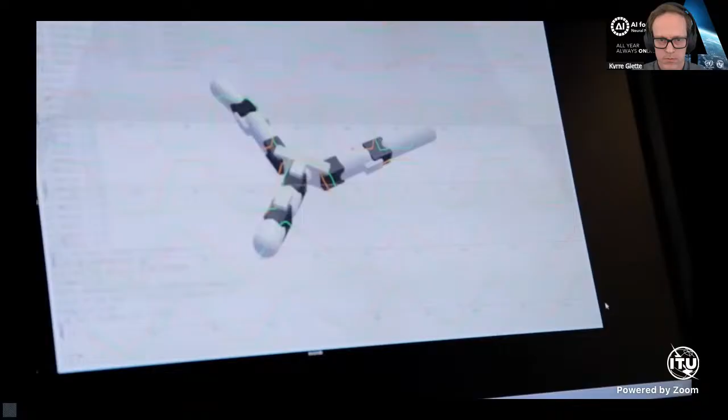Kyrre, are you meant to be sharing your screen right now? Yes. Did it disappear? I can't see it. Oh, thanks. Sorry. That's okay. Then I will try to fix that. Then I will restart the video. Okay, thanks, Kyrre. Can you see my screen now? Yeah, we can. Thank you.

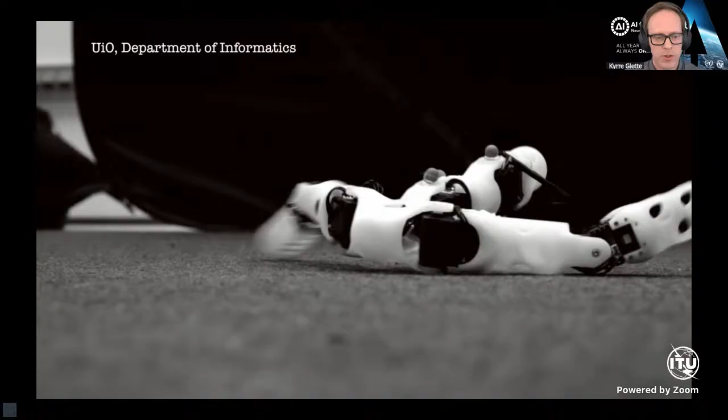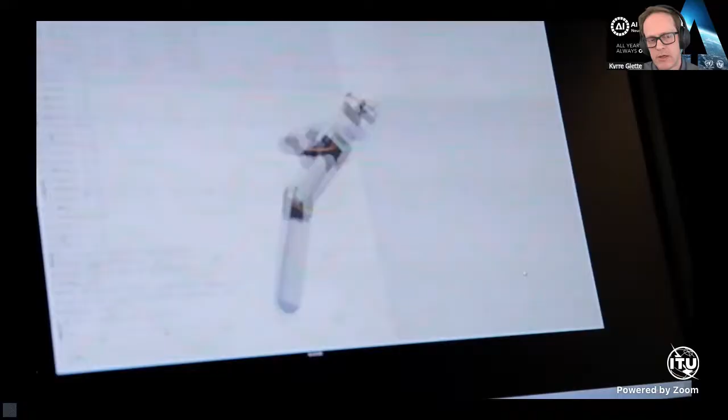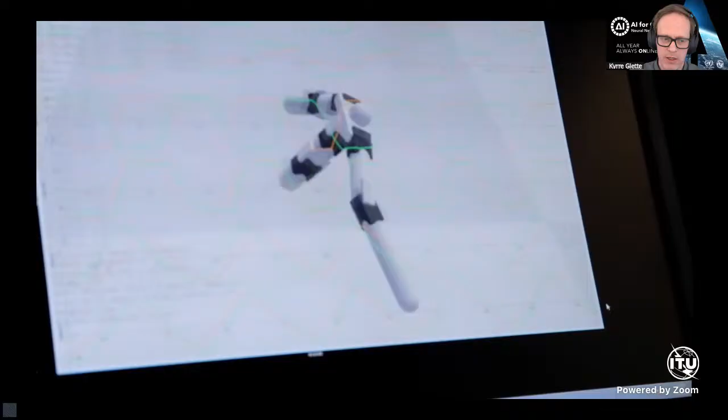Okay. So here you see the robot crawling on the floor, and you will also soon see a robot being simulated on a PC screen. So these are our robots designed with biologically inspired principles on how they are constructed, and we are using a process called evolutionary algorithms to test out many different solutions and to find innovative solutions.

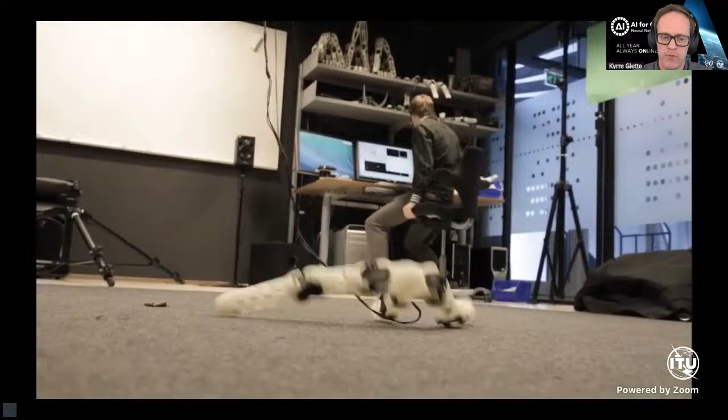So here you can see that the simulator is testing a lot of different combinations of building blocks for the robots and tries to assemble them and see if they can move. There's a lot of trial and error, and some solutions just don't work, so they don't get carried on to the next improved generations. I'll get into details about the algorithm shortly.

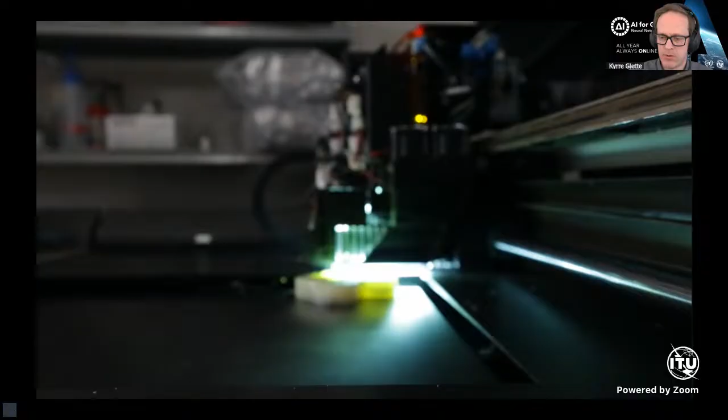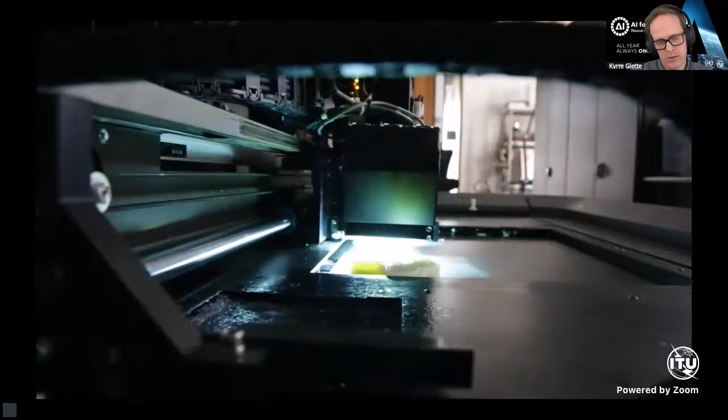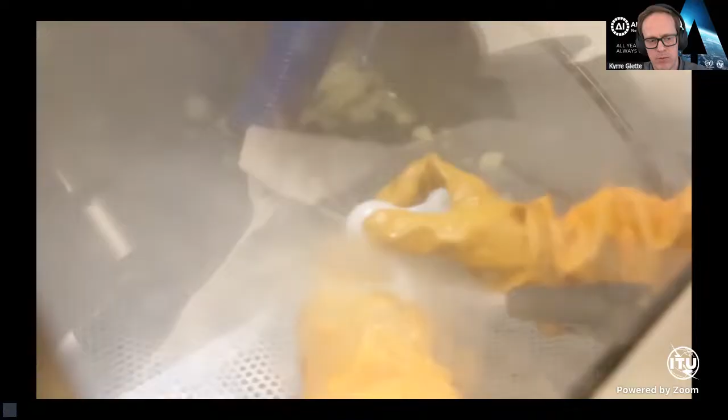We also did 3D printing of the robots that we found to be most promising from the simulation, and then wanted to test them in the real world. So here you can see a 3D printer in action, printing layer by layer the components that constitute the robots. There's a need for some post-processing of these parts before they can be assembled with motors to produce a working robot that we can test in the lab.

Okay, so that was a little introduction to what I'll be talking about. More specifically, I'll give you a little bit of motivation why we're doing this kind of research. And I want to show to you this framework, the overall design principles of doing this co-design of robot morphology, the shape of the robot, and the control of the robot at the same time.

I'll talk a bit about some of the algorithms that we use, such as evolutionary algorithms. And I will talk about using simulators versus testing things in the real world in our research. We'll also talk a little bit about the principles that we use that are inspired from biology to create more efficient and robust robots. I'll also try to look into some perspectives on sustainability.

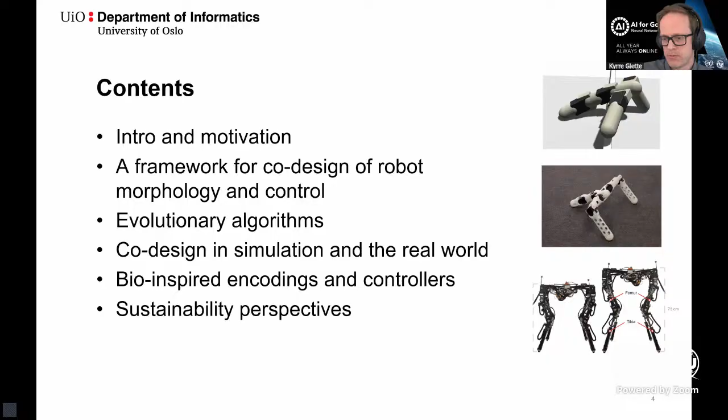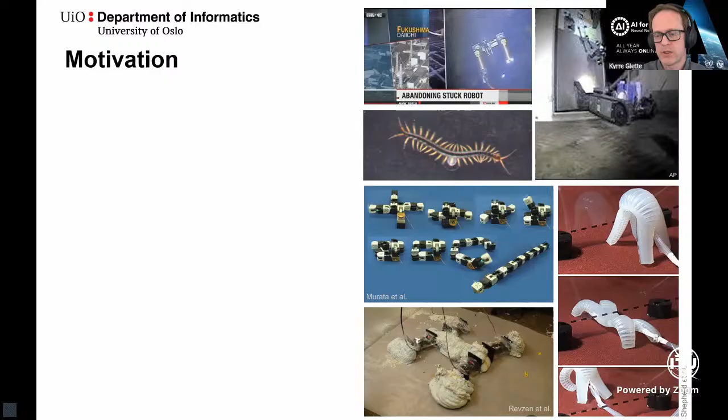So the motivation for doing this kind of research is looking ahead into the future. We are doing fundamental research. We are developing algorithms and methods that could potentially be deployed in robots in the future. So it's currently not stable enough to be used in typical real robots that have to do something critical. But our thought is that we would like robots to be more robust than they are currently.

So today's robots prefer to work in structured, well-known environments. But we see that there is a need for robots to operate in remote locations, dangerous locations, in disaster areas, for example. And maybe they could be used for long-term autonomy tasks, such as environmental monitoring. And in this case, it would be nice to have robots that are able to recover from damage or adapt to new situations, that the robots are energy efficient and using new principles for building robots.

We can see in the research that there are a lot of interesting new principles for building robots, such as modular robots that can reconfigure into new shapes depending on the need. We see soft robots that have very specific ways of actuating, can change their shape, and by that being both quite robust and have quite interesting modes of locomotion. You can see down here an example of a robot that was constructed by the use of a spray gun. So there was a foam sprayed by a second robot to build the robot parts.

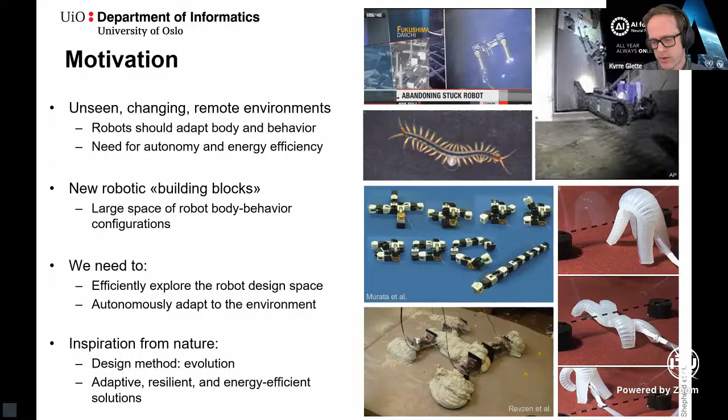And this is why we go to the bio-inspired scenario. So we use what we call evolutionary algorithms as a way to design the robots, both the shape of the robots and the control of the robots. And we also look to principles for controlling the robots and how to build these structures from biology.

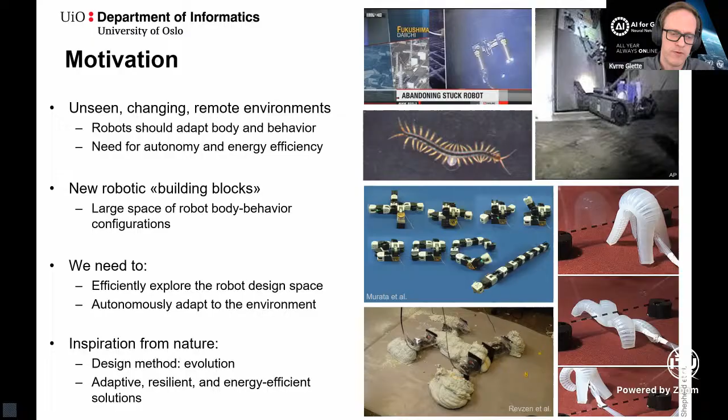And then this evolutionary algorithm iterates. It's an iterative process. It can do thousands or even millions of iterations, continually trying to improve the solutions that it creates. And there's also room for learning while these robots are evaluated. So it proposes new robot shapes or morphologies, and it might be unknown how to control them. So there might be also this learning process, some algorithm that improves them.

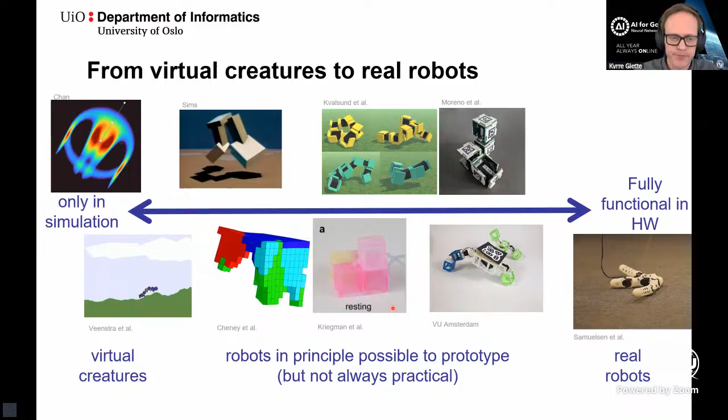And then a bit about how the simulation or the evolution is done. So there are some experiments where they do only simulation, and there is no intent to produce the robots. But still, you can see quite interesting results from this.

And then maybe the most common approach is to do simulation. So you can test a lot of different combinations without any fear of breaking the robots or doing anything bad. And you can test a lot of different solutions on parallel computers. So it's a fast process. And then you can take those that are most interesting and produce those as real robots. Then you don't waste so much material and time.

On the right side, there is the approach of doing only hardware evolution. So this is a bit more slow, but it could be quite interesting. And I'll get back to that a bit later.

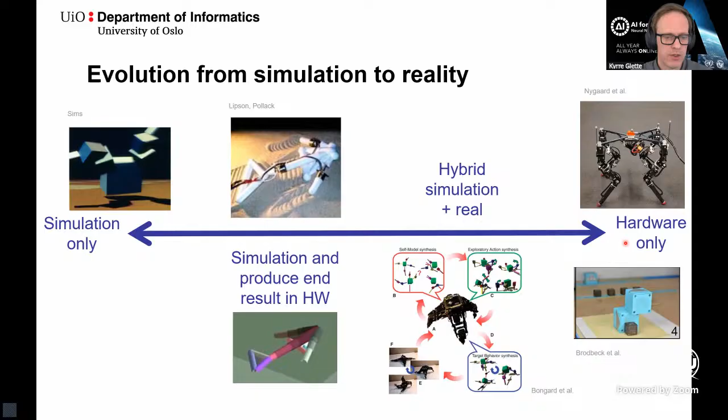So first, to show some examples from this simulation approach, where we do most of the evolution in simulation and then go on to validate some solutions in the real world. So in a way, this is a quite practical approach. You can test out a lot of different simulation results before moving to the real world. Ideally, it would be a perfect way to produce a robot that could be used for some real tasks.

However, we do have a challenge in that the simulation is not always, or usually not, describing the real world perfectly. And the evolutionary algorithms do exploit this to create solutions that are not always working very well on the real robots. There are some methods to address this, but it's usually a challenge that requires us to either do a lot more computations to be sure that the robots are more robust, or maybe do some learning on the real robots once they are produced. This is called the reality gap or the sim to real challenge.

So I'll show some examples from our own research on this. So from the video in the beginning, same experiment. We used a multi-objective evolutionary algorithm so that we could evolve robots that were both fast and also not so big or not so heavy. This is a little bit conflicting because the big robots are usually the fastest ones. But using this, we could get a selection of robots that we wanted to test in the real world. So we chose robots that were quite different qualitatively in terms of morphology.

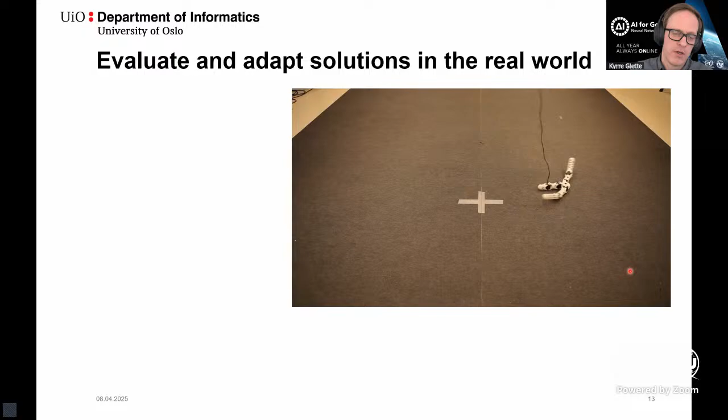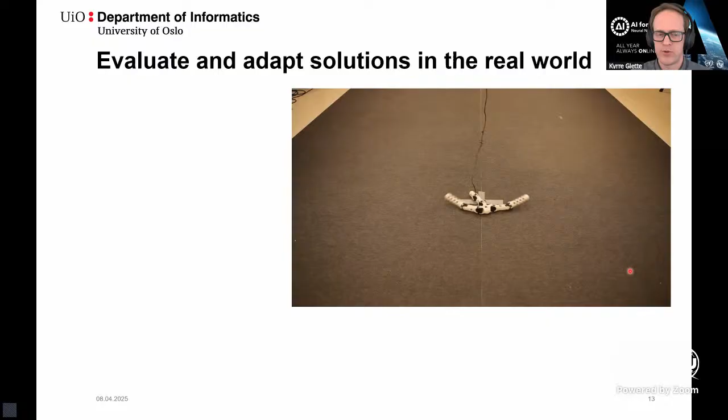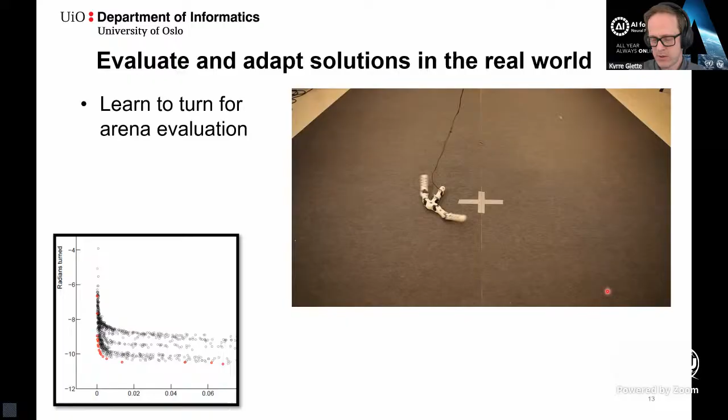You can see here how one of the robots performs in the real world. So in this case, the challenge was we had a certain arena where we could measure the movements of the robots. So the first thing we had to do was to actually have the robot learn how to turn, because there is a new body shape and we didn't know exactly how to make it turn. But we needed it to turn so that it wouldn't walk off the arena and not be possible to measure it. So we ran a multi-objective evolutionary algorithm to make it turn while not being too much displaced.

Okay, then I want to show another example, and this is using a quality diversity algorithm. So in this case, we wanted to explore the design of linkages. So this is this interesting mechanical mechanism that we can use by having one rotational axis and translate that into a movement. So by having just rotation in this point, we can get a quite interesting trajectory of the end effector, like the foot tip of the robot.

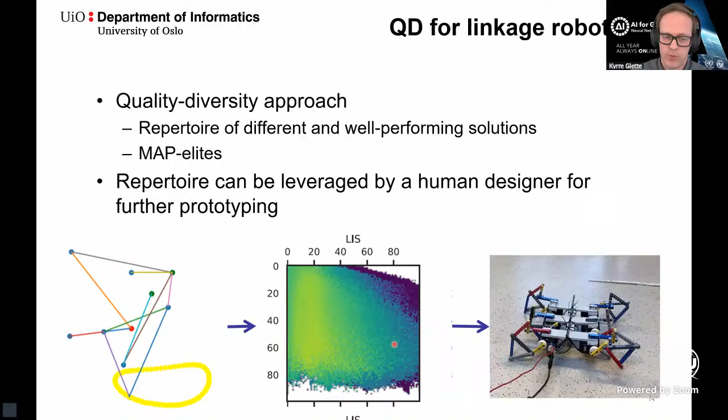And then we used this MAP-Elites algorithm, a quality diversity algorithm, and managed to then fill up a map with different solutions to the problem, which we could then use to build robots to test it. So in this case, we explored different ways of characterizing the solutions. So for example, there were properties on the mechanisms, like how many bars it used, and also properties of the trajectories of the foot tip. So like how much it may raise the foot tip, for example, how long contact with the ground.

And once we had done this exploration of different types of characteristics, we wanted to reduce the maps so that it would be more tractable for a human designer to explore these different solutions. And then we select some of these to be produced with Lego bricks. So in this case, we chose Lego bricks because it was a fairly simple way to prototype our designs without having to 3D print. And it's quite nice in a way, as long as it doesn't get too complex.

So in this case, we tested some designs, and you can see that the results lead to quite different behaviors by changing the composition of the bars. So in this case, maybe it was not so much about automatic adaptation, but as a design tool to explore what's the design space of these kinds of robots.

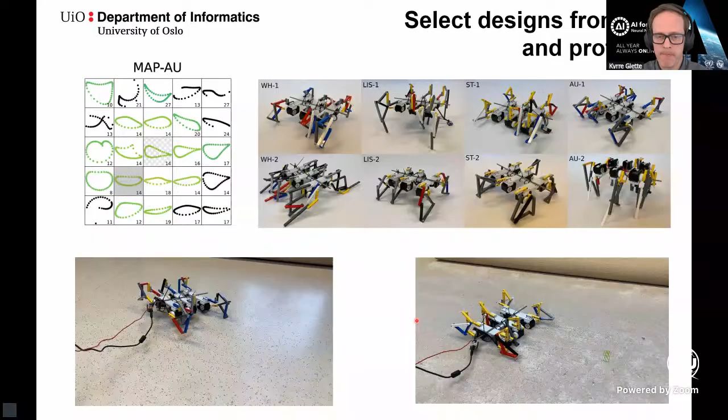Okay, now I would like to talk a bit about real-world evolution. So in this case, we want to see how we can benefit from doing evolution only on real-world robots. So it makes the reality gap disappear in a way, because then there is no transfer from simulation to reality. On the other hand, though, it's quite time consuming because this requires us to test every solution in real time on a robot.

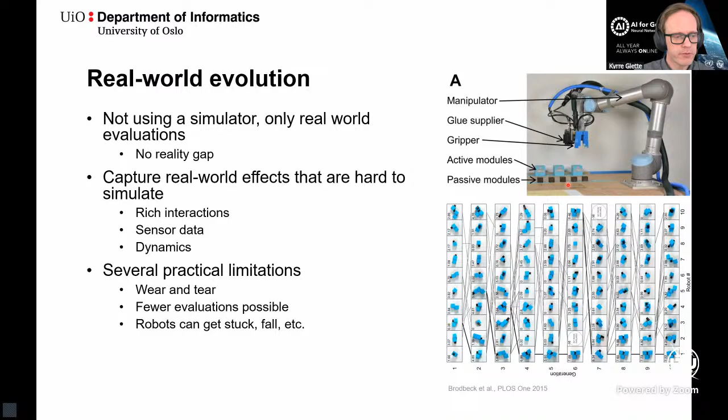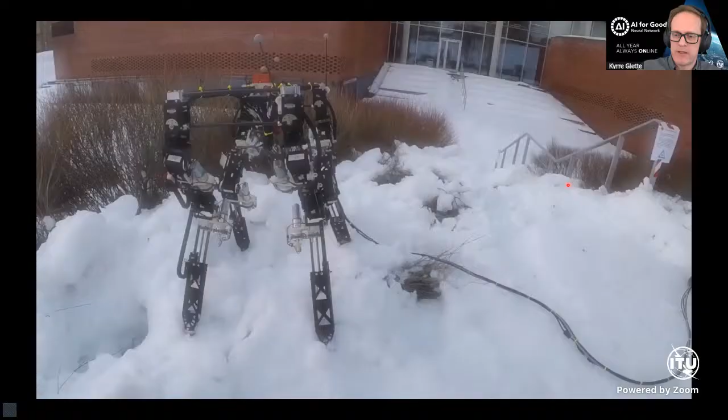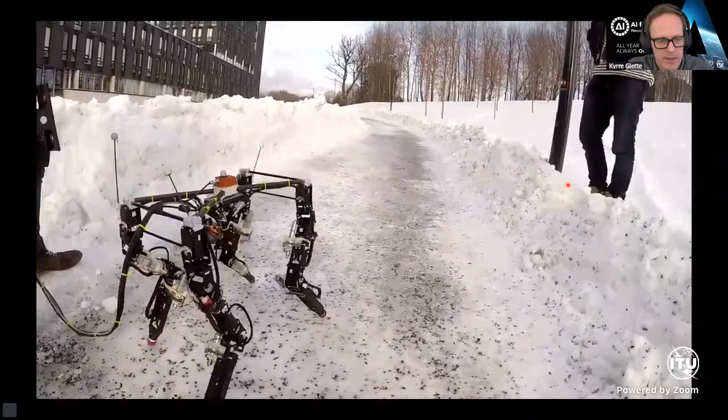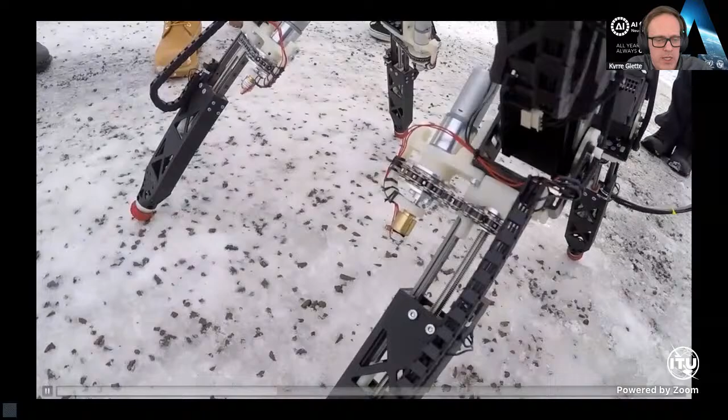But we have done some research in this area, and it's on this robotic platform that I'm showing you now in the video. So this is the dynamic robot for embodied testing. So it's not exactly a typical Boston Dynamics robot, but it is built by only one PhD student, and it has this particular mechanism that lets its legs be reconfigured, so it can change the length of the legs both in the upper part of the leg and in the lower part of the leg. So this allows us to reconfigure the robot in a way that we can test different morphologies.

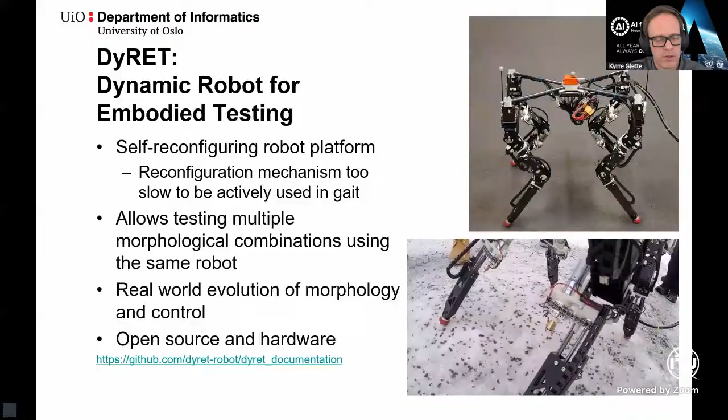This mechanism is actually too slow to be used actively in a locomotion pattern. But it can be used in between to reconfigure to test different morphologies for an evolutionary algorithm. Here you can see a close-up of this mechanism. So then we were running an evolutionary algorithm to see if we can see something interesting from this purely real-world evolution.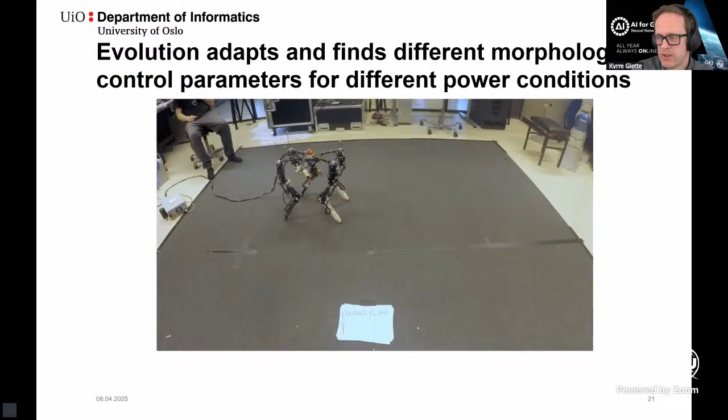So here you can see the robot is testing various control systems, various controllers, and also reconfiguring itself. It's not so easy to see it, but it does test various lengths of the legs. And what we did was to have two conditions. One condition where we gave it optimal voltage for the motors, and another condition where we reduced this available voltage. So then the motors would be less strong in practice.

And what we could see is that up to a certain speed, the evolution managed to find similar performance both on speed and stability, even if the voltage was reduced. But at the same time, the morphologies and control that was evolved was different. So we could see how evolution found a way to adapt to the different power constraint setting. So this could be useful, for example, if there's a scenario where the battery runs low or it needs to save energy.

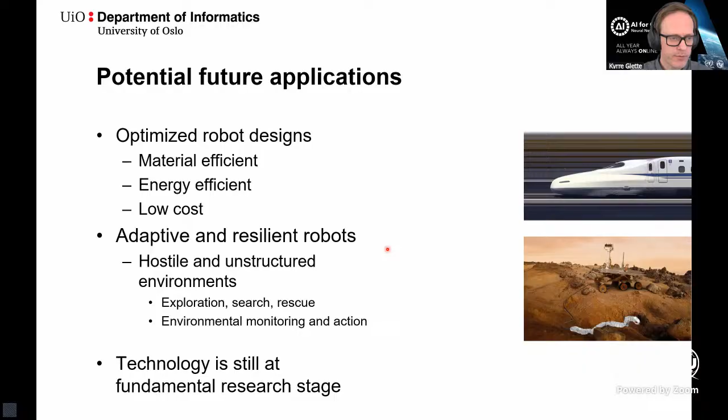Yeah, so then I think I will summarize. I've talked about bio-inspired and evolutionary robotics, where we take inspiration from natural evolution, and we also take principles from nature, such as decentralized modular controllers and various ways of generating robot bodies to shortcut the design process to have robust designs. And how we use these algorithms to explore adaptation to environments and to different tasks, and see how the body and control both change as we let them do different tasks. And we can see some trade-offs, and it can be used as a design help.

Especially these quality diversity algorithms are very interesting when it comes to exploring different designs and having different solutions to problems. I also talked a bit about how we can compare evolution from simulation and evolution only in reality, and what the different challenges are with this.